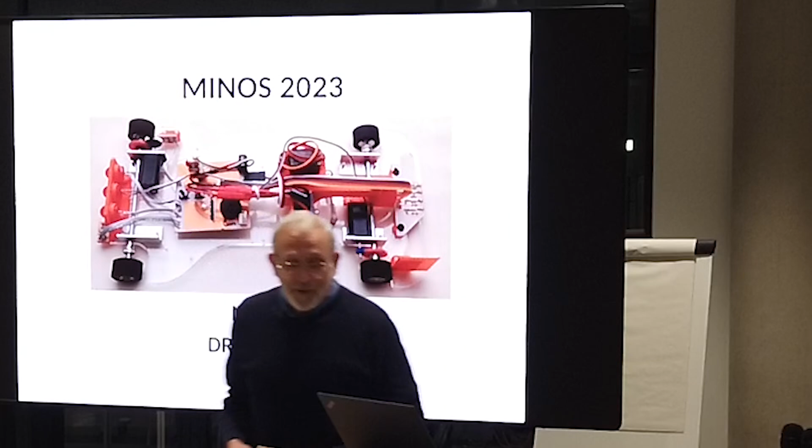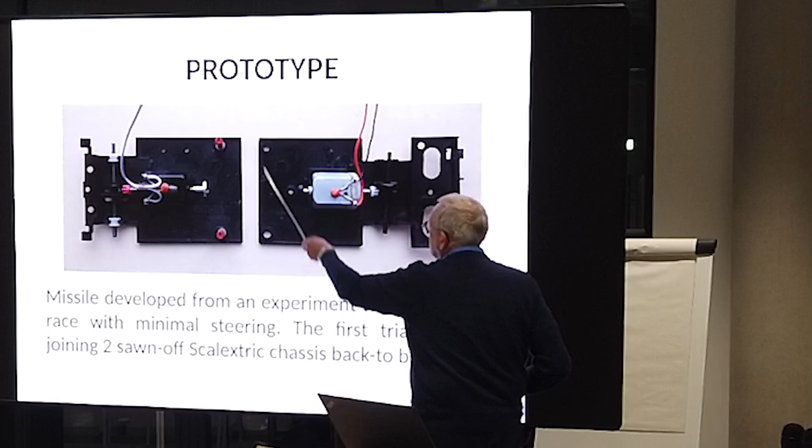It turned out that almost every design we ever tried did too much steering. So I had a look at putting two cut-down Scalextric chassis back to back, so that it would generally run straight, and then finding a way of steering between the joints, so putting some sort of hinge in here so that you could steer just by changing the geometry of the chassis.

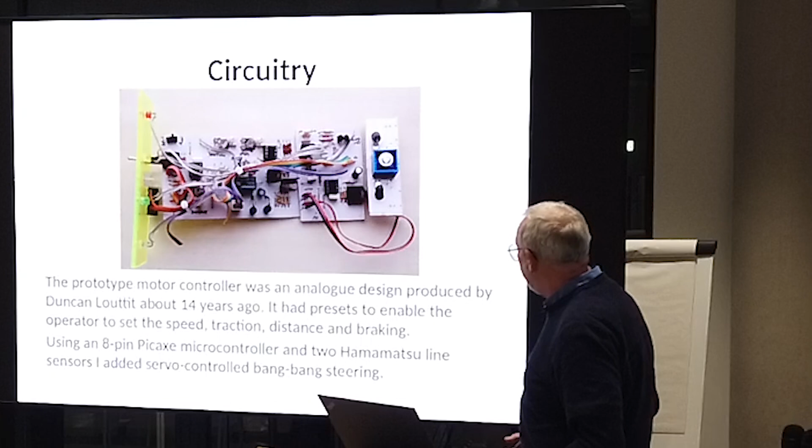That seemed to work, and Duncan designed a controller for me which had incredible traction control, speed control, braking. It read the distance on the odometry. All I had to do was, using a PICAXE microcontroller, as I did in those days, control the steering, which was bang-bang steering in those days.

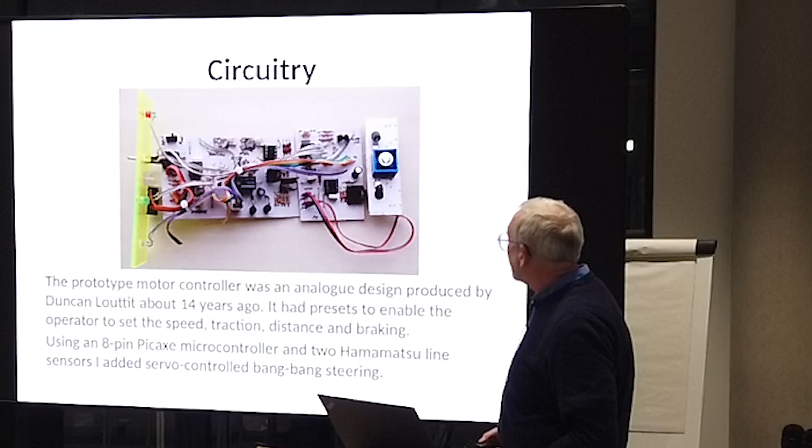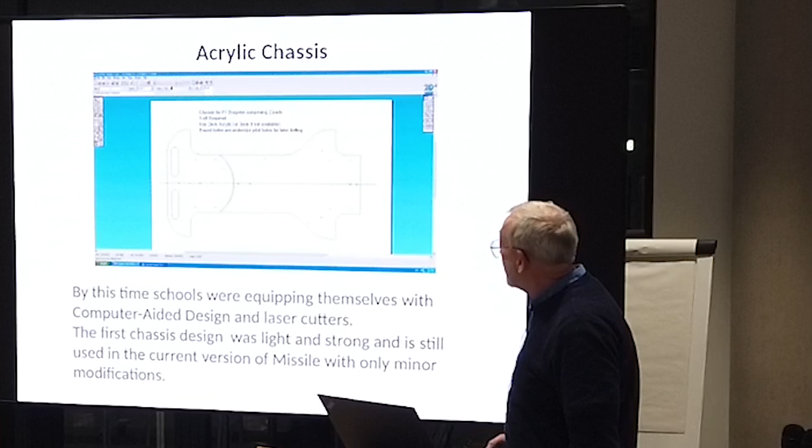Schools were just getting into kits, CAD and laser cutters, so the first proper chassis is the actual chassis that I use now, made of 2mm acrylic, light and strong, and I only needed to minorly change it for the current incarnation of Missile.

So there's the current version. It's got 4 sensors at the front, it's got brake lights at the back, a very small circuit board, electronic speed control, and servo steering.

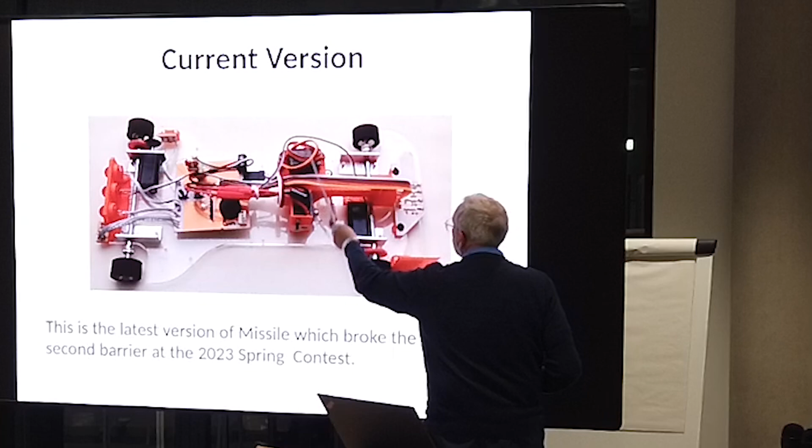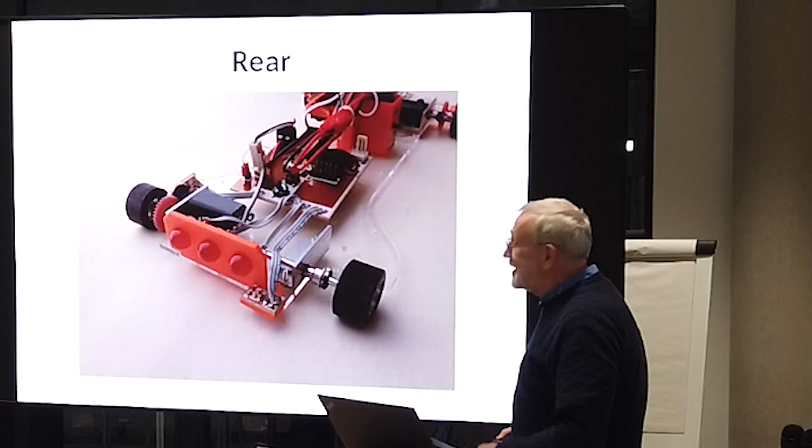And there's the brake lights. I went overboard a bit, you might think, having 3 10mm brake lights, but when it's going quite fast, you need to see when the brakes are coming on, and that guarantees that you've got a half a chance of seeing it.

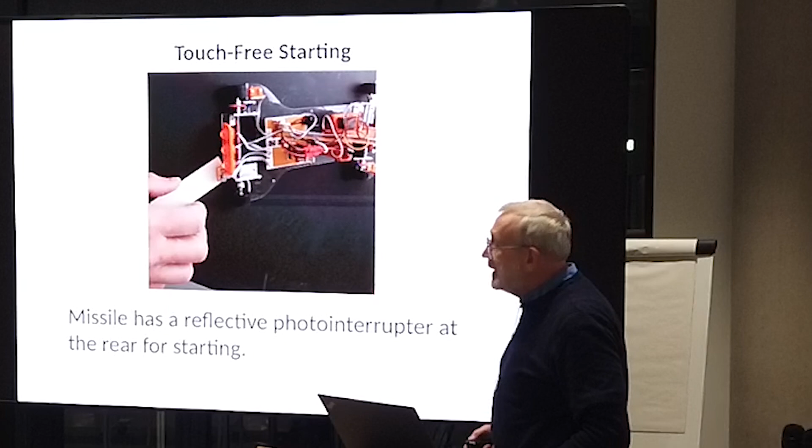And it's got a sensor at the back, similar to a line sensor, so that you can start it by just pulling away a piece of plastic. We did have originally some sort of micro switch starting, and that was very unreliable. This way it's touch-free and the thing gets away pretty quickly.

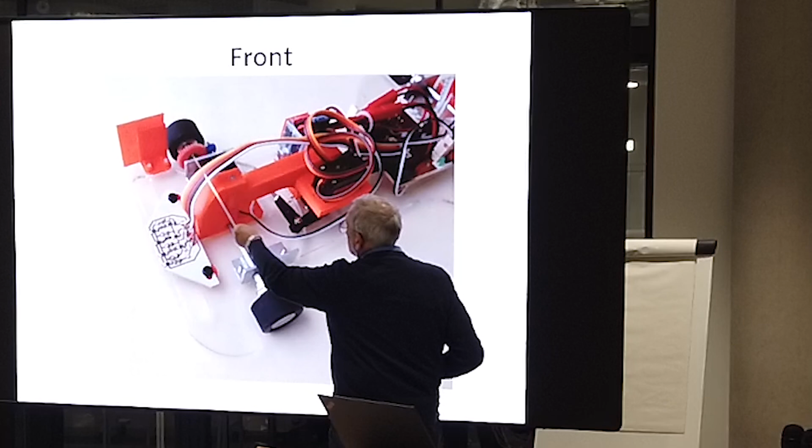The design of the front - it's a good opportunity to show you that what I've got here is a Scalextric motor and a set of gears which is about 4:1, and Scalextric tyres. In this case, they are the thing for the job, you know. Something soft and with some width is good.

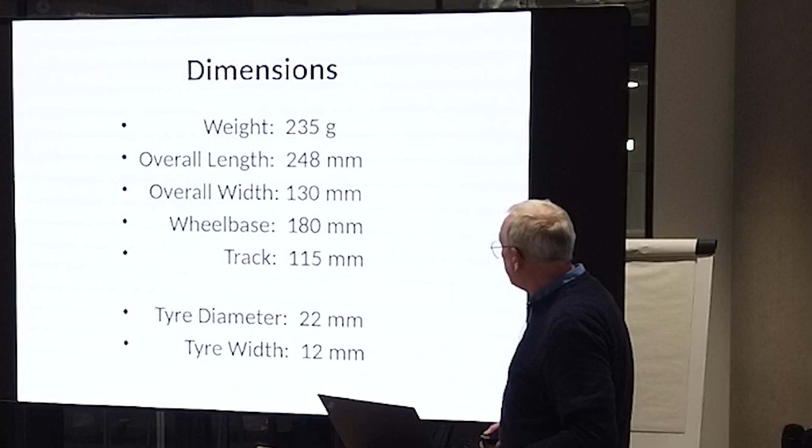So the dimensions - I designed it to be roughly at the limit of the length. The width was limited by how big a piece of steel I had for the axles. So it's 130 wide, the wheelbase is 180, the track distance is 115, tyres 22mm, width of tyre 12mm.

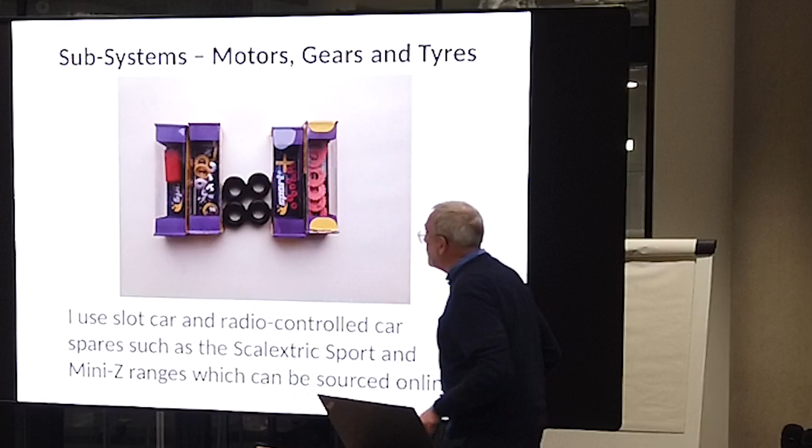Then I got my parts from eBay, and Scalextric do a set of spares, and you buy the gears in sets of 5, and also the pinion, and also the gears, and you can get spur gears and crown gears, and you can get motors in different speeds. The ones I use are 30,000 RPM, but obviously they don't go at that speed when it's running.

I use an electronic speed control from radio control aeroplanes, and a 9-gram servo. The only requirement for the ESC is that it should be able to go in reverse. It doesn't matter if it hasn't got a brake, because braking on the missile is done by slamming it into reverse. And the servo should have metal gears, because you will crash and strip the gears.

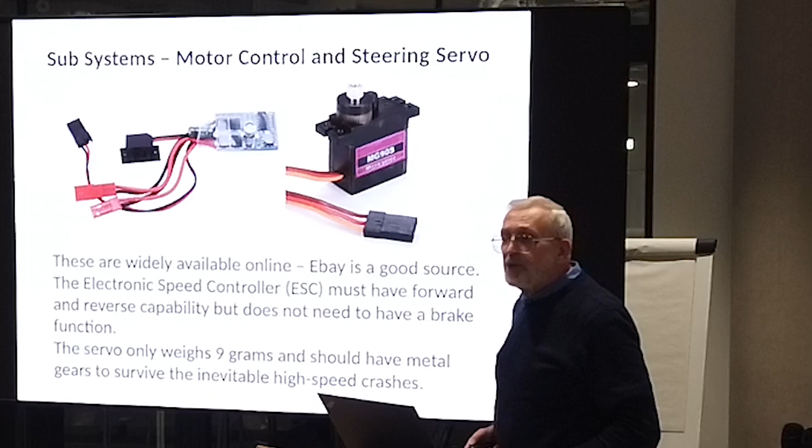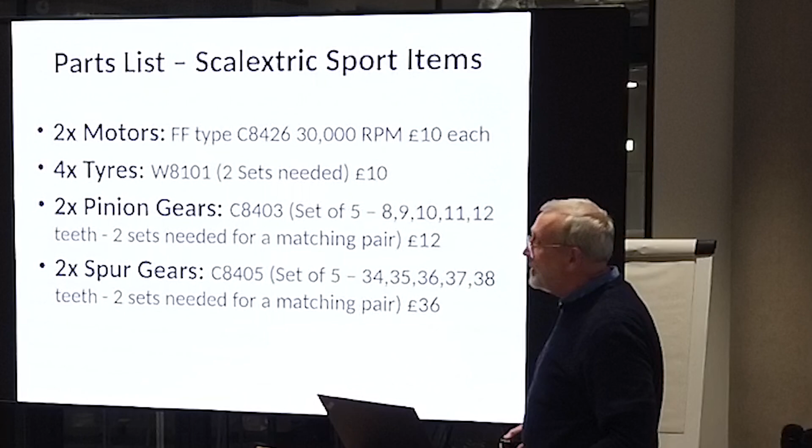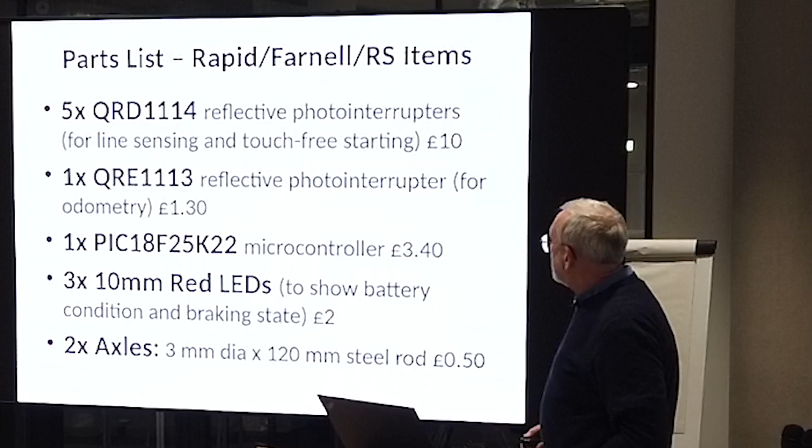To give you an idea of how much everything costs: 2 motors at £10 each, so £20 for the motors. Tyres you need 2 sets, because the front wheels of Scalextric cars are thinner than the rear, and you really want the wide ones front and rear, so that's 2 sets for £10. Pinion gears are very cheap, 2 sets only cost £12, but the spur gears are expensive, £36 for 2 sets. If you could buy them individually it wouldn't be so bad. I use standard photo interrupters for detecting the line and for the odometry, and a PIC microcontroller, the same one as ever, £3.40. Red LEDs, £2, 2 axles, 50p. I haven't costed in the smaller items.

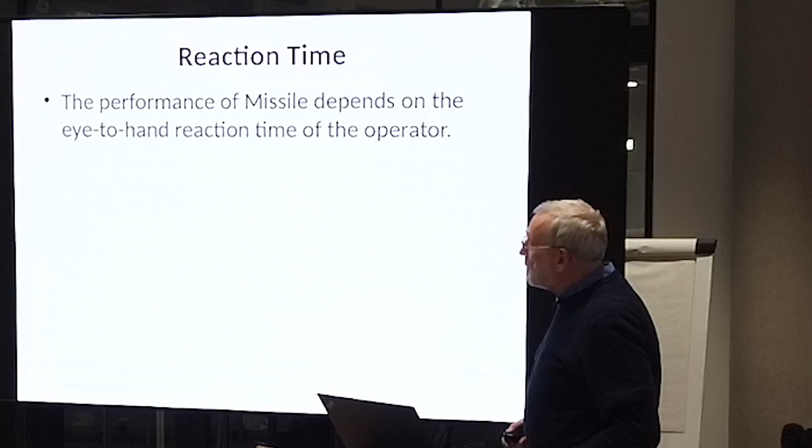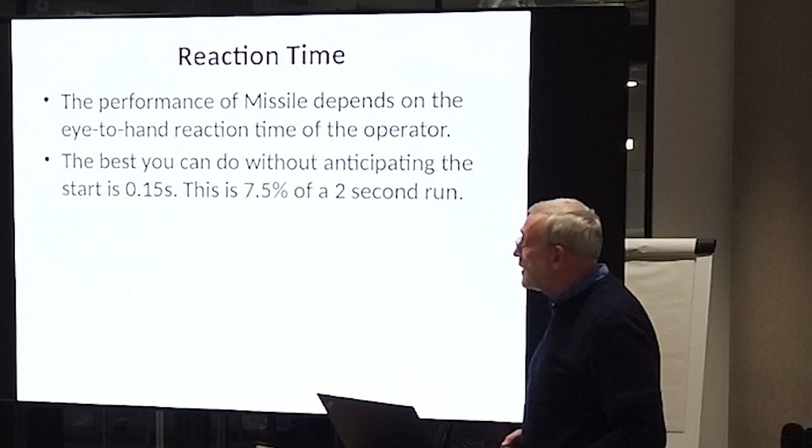The performance of the missile largely depends on the reactions of the operator. You can have the fastest mouse in the world, but if you're not quick off the mark in starting, it just adds to the time of the run. It's usually said that the best you can do in reaction time is 0.15 of a second, but that represents 7.5% of a 2-second run. It depends on your age and your muscle memory - the more you practice, the better you get.

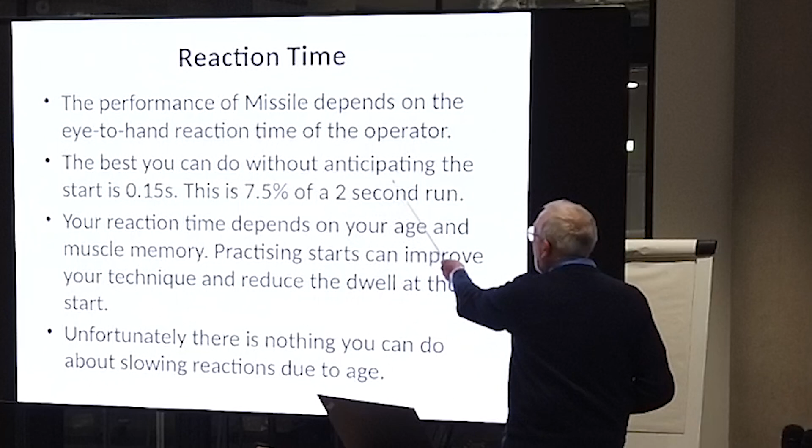Unfortunately there's nothing you can do about slowing down your reactions due to age. But in the spring competition, in the final, when I was next to you, you had the reactions of a 10-year-old. I could hear your missile zapping down before I'd even seen it turn, and I thought, oh, it's a false run - but no, you hadn't. I knew you were fast, I anticipated. You successfully anticipated - the more experience you get, the better you get at anticipating.

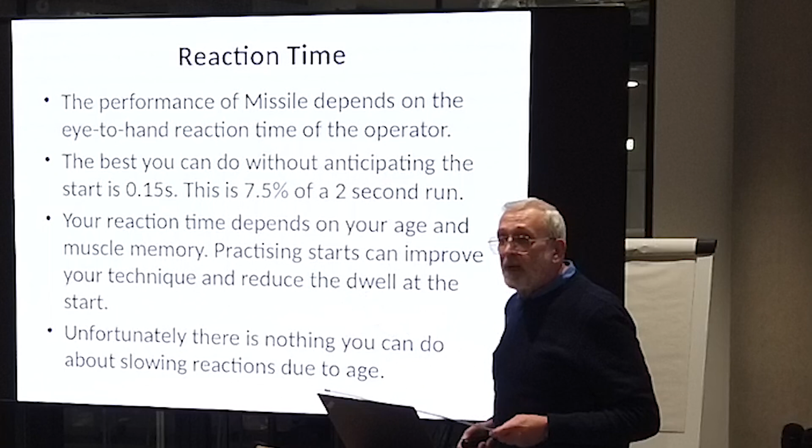The timing gear had a fixed final delay. Dave had told us before the final that he didn't have a random delay - he said he had a fixed delay, so I took a chance. Admittedly your mouse was under 2 seconds, wasn't it? 1.8. Yeah, so it would have been a lot closer, I assure you.

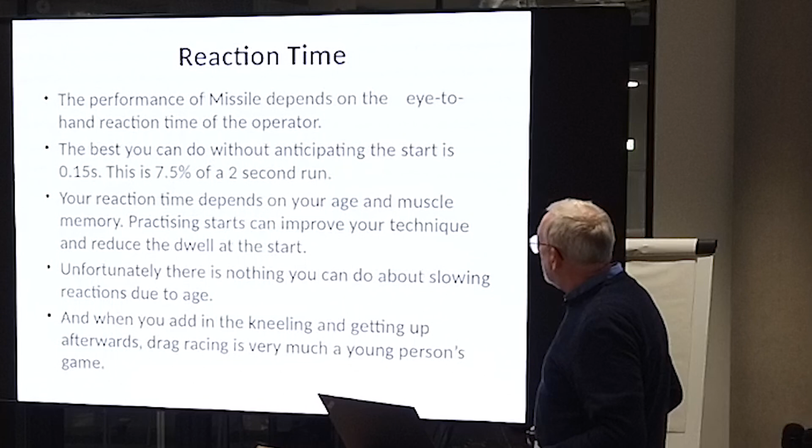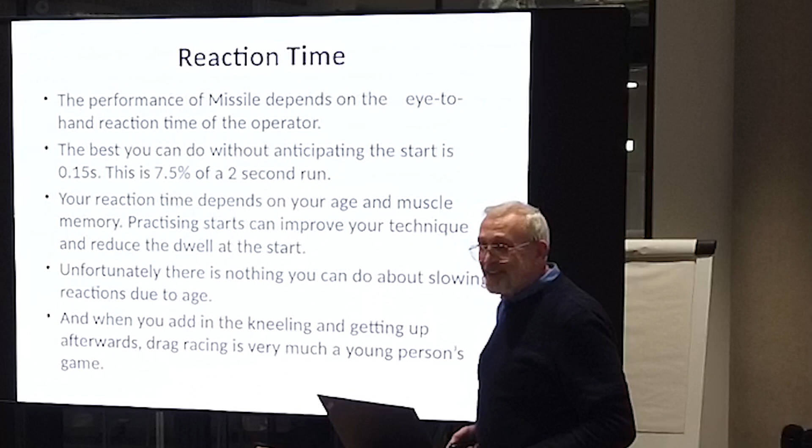So it depends on eye-to-hand reaction time and so on. But when you get to my age, kneeling down and getting up tells you it's really a young person's game - I struggle now to get down and back up again.

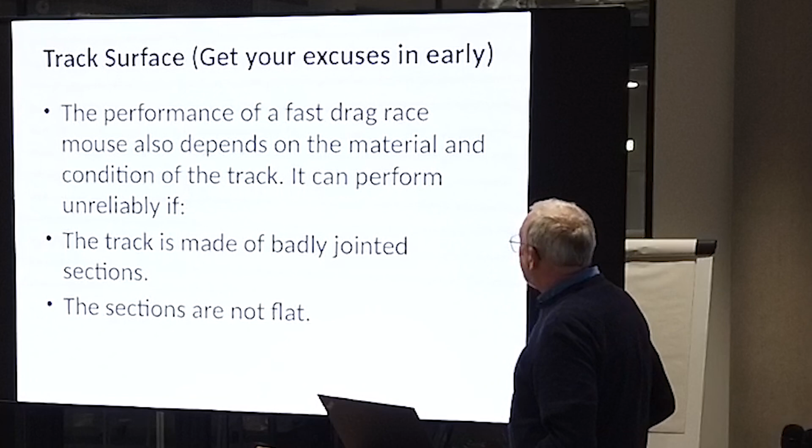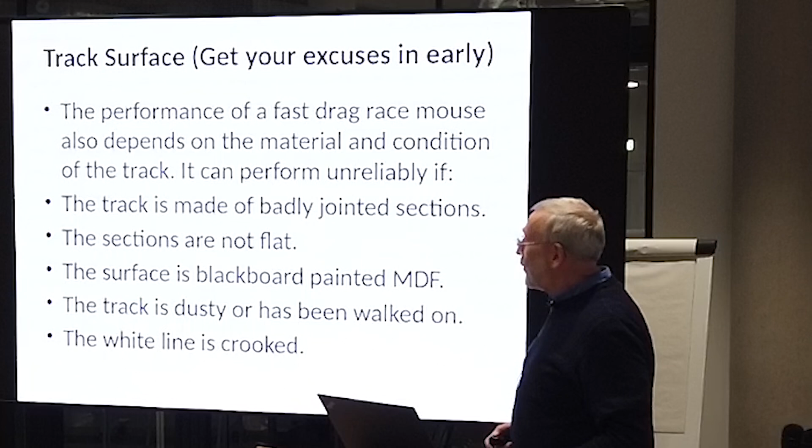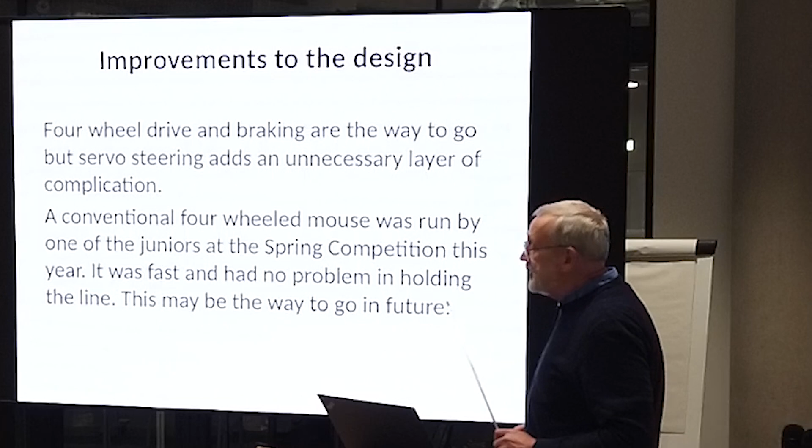There are a couple of improvements I've thought of over the years. Four-wheel drive is definitely the way to go, but the servo steering is a bit overkill and probably needs to be designed out. We saw a four-wheel drive mouse with the conventional two wheels on each side driven by the same motor, and that was very fast - it had no problem holding the line, and it's probably the way to go in future. It might also be worth investigating a mouse with a motor on each wheel. Obviously people will try that at some point - I haven't tried it yet.